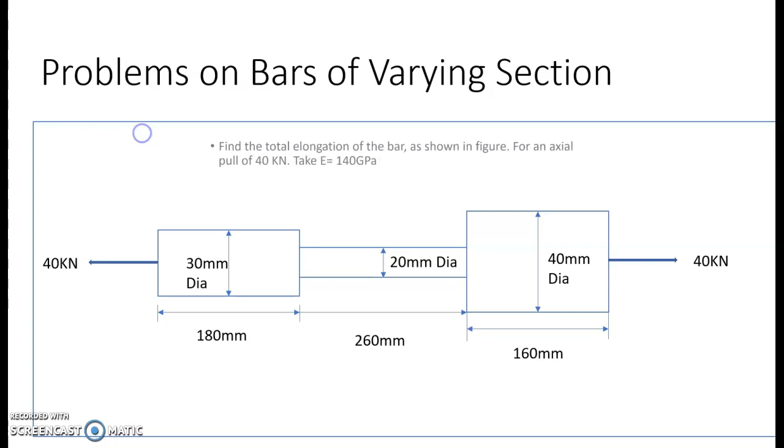In this video, I'm going to take problems on bars of varying section. So this is the figure of the problem. This is the statement: find the total elongation of the bar as shown in figure for an axial pull of 40 kN. Take E equals 140 GPa.

So this is the figure, which has three different diameters, 30 mm, 20 mm and 40 mm, connected with a 40 kilonewton axial pull force. Okay, with different lengths also: 180 mm, 260 mm and 160 mm. So we need to calculate the total elongation of the bar.

Material is same. How are we going to identify this? Because the modulus of elasticity given here is same. They have mentioned take E equals 140 GPa. It means that E is same, so the material is same. The only difference is the diameter. So we need to calculate elongation of the bar.

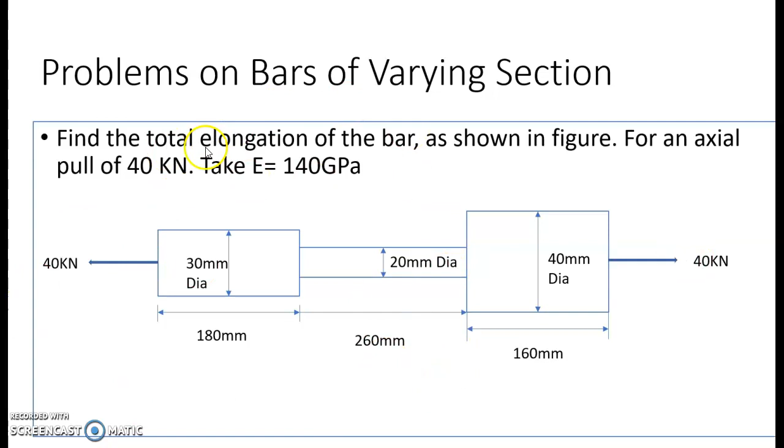So we know the formula delta L equals PL upon AE. What we will do is add the different elongations of the different diameters of the bar, so definitely we will get the total elongation. So this is the axial pull force. This is the statement of the problem. So we need to calculate the elongation.

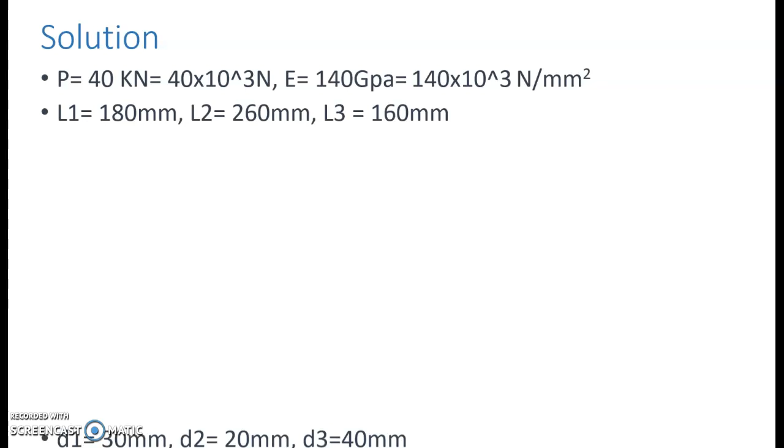So now P equals 40 kilonewton, which is converted into Newton, and E is in GPa, which is converted into MPa. L1 equals 180 mm, L2 equals 260 mm, L3 equals 160 mm. Diameters are given 30 mm, 20 mm and 40 mm. So you can pause the video here and calculate the area.

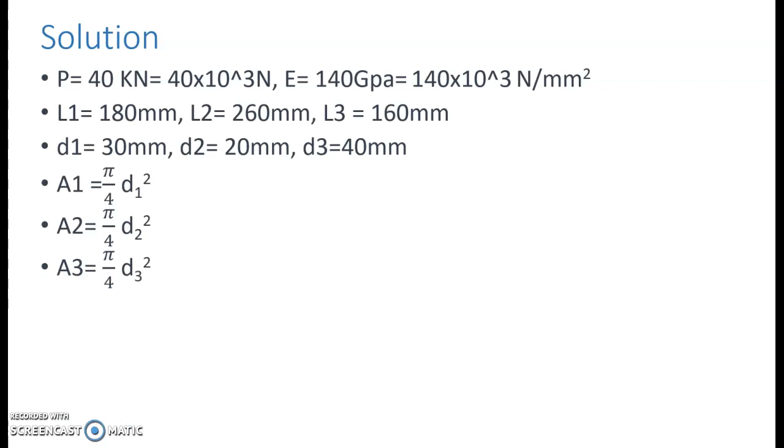Diameter is given, so A1 equals pi by 4 D1 square, A2 equals pi by 4 D2 square, A3 equals pi by 4 D3 square. Pause the video here, calculate the areas and cross check. As I already told you, delta L equals delta L1 plus delta L2 plus delta L3. How is delta L calculated? PL upon AE. So PL1 upon A1 E1 plus PL2 upon A2 E2 plus PL3 upon A3 E3.

Here modulus of elasticity is same, so E1 equals E2 equals E3. So P by E we can take common, and in the bracket L1 upon A1 plus L2 upon A2 plus L3 upon A3. So like that they have written delta L with L1 upon A1, L2 upon A2 and L3 upon A3. You can cross check the values of A3. This is A2 and this is A1.

This is the P value, which is given. The E value is also given. So calculate delta L here: pause the video, calculate it and then cross check with the final answer of delta L. This is a very simple problem on bars of varying section.

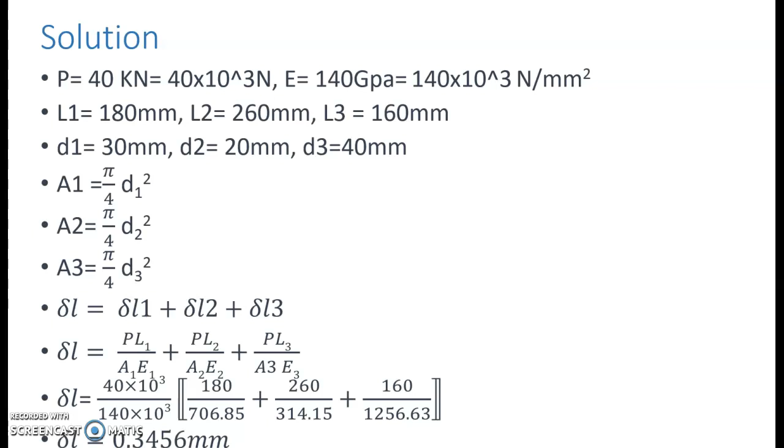Okay, so we will go for the solution. In this problem, what basically do we need to find out? Stress. What is not given? P is not given. What is given? Length is given, right?

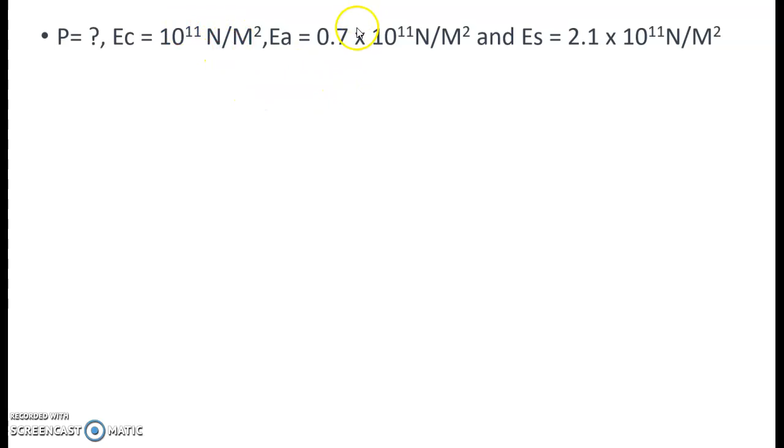So P is not given. You need to first convert EC, EA and ES. They should be in Newton per mm square. So you just divide by 10 to the power 6, because it is in meter square and mm square. Then it will come to 10 to the power 5. So EC equals 10 to the power 5 Newton per mm square. Calculate EA and ES the same way.

So LC equals 100 centimeter, LA equals 50 centimeter and LS equals 75 centimeter. They are mentioned in the problem. Now, the lengths are given and the moduli of elasticity are given. What is the formula of delta L? Delta L equals PL upon AE. So we know the total elongation. AC, AA and AS are also given in the problem.

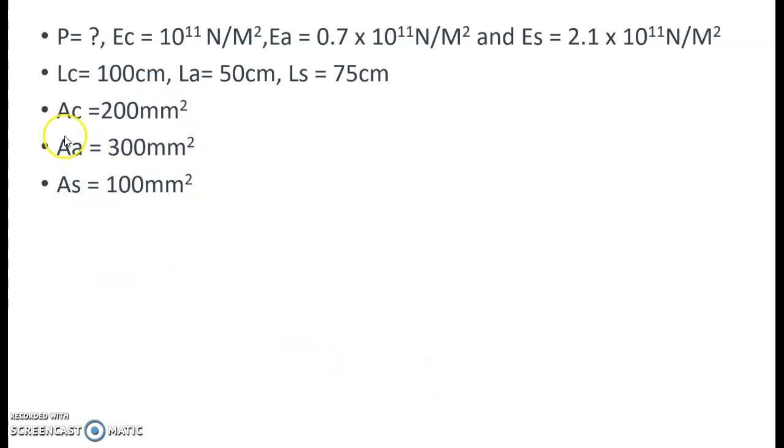Now delta L equals delta LC plus delta LA plus delta LS. So we can write PLC upon AC EC plus PLA upon AA EA plus PLS upon AS ES equals delta L. So now I will write here 1 mm, which is given by the problem itself, and P is unknown. LC, LA and LS are written here, AC, AA, AS here, and EC, EA and ES we have mentioned here. You need to convert them.

So we will get the P value by equating to 1. Why 1? Because they have mentioned the bar contracts by 1 mm. So this is the bracket and the values are here. You can pause here and calculate the value of P. Pause the video and check the P value. So the P value is 9130.43 Newton.

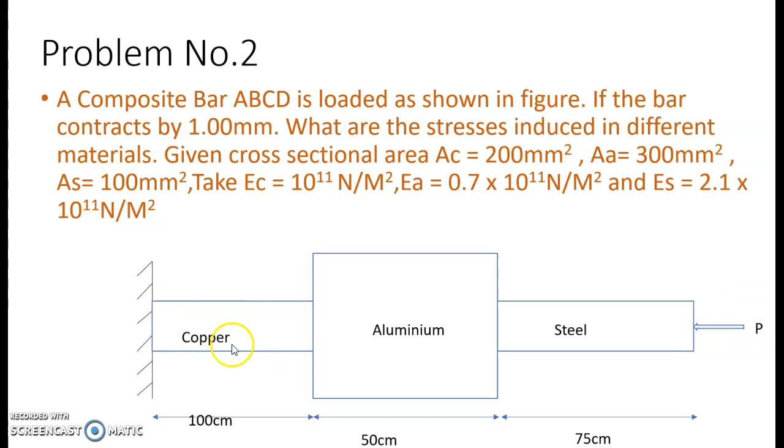For copper, for aluminium and for steel, this P value will be the same. We only need to divide it by the different areas. So P upon AC. Here you can pause, calculate it, and cross check with the values.